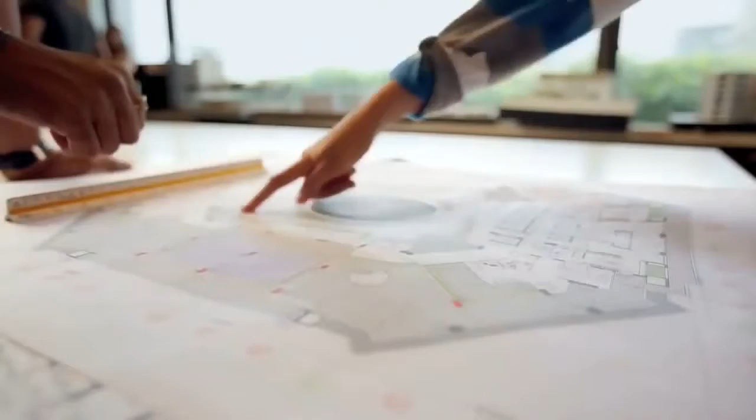It's at the gateway of the new Mumbai, where all the new infrastructural developments and new buildings are coming up. That's the happening location of Mumbai. The architect, Naushad Talati, it was his dream to build a building of such proportion. So he had this brilliant idea of the octagon and angled the views, and I said, wow. So it was like love at first sight.

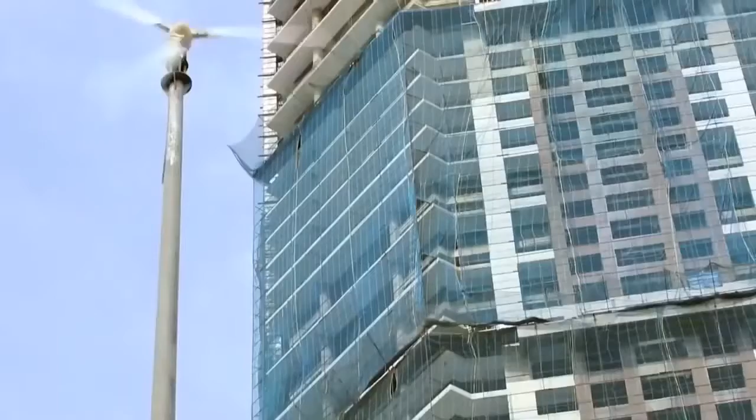The owner in this particular case always kept asking, what is the best that's available anywhere in the world, and said, okay, why can't we adopt it here in India on this particular building? And that led to all these different innovations in design and technology.

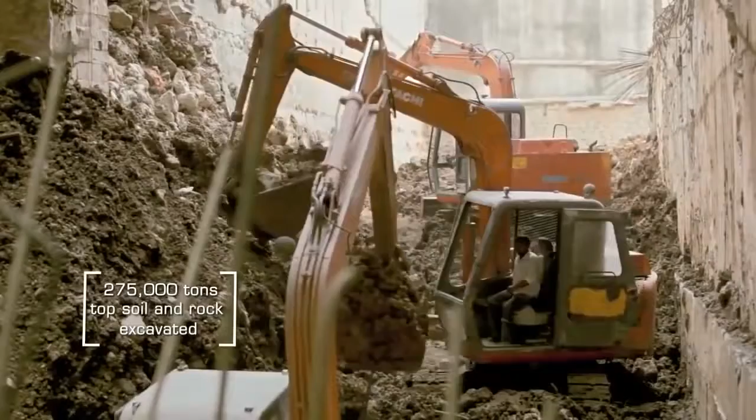Excavation was a huge task. The overall excavation volume in this plot was 150,000 cubic meters, out of which 50% was in the soft soil, filled up soil and marine clay, and remaining was weathered rock.

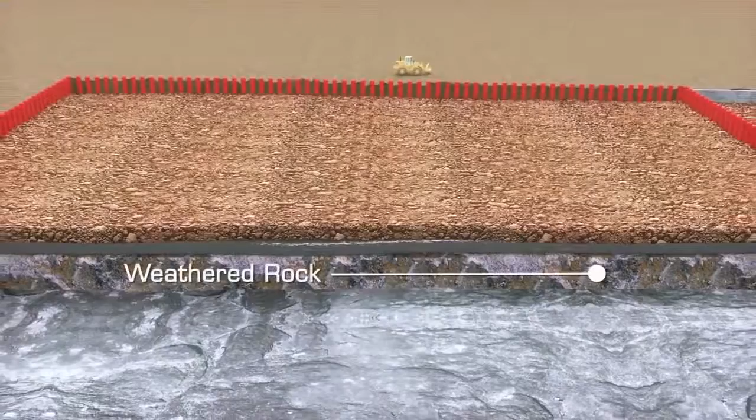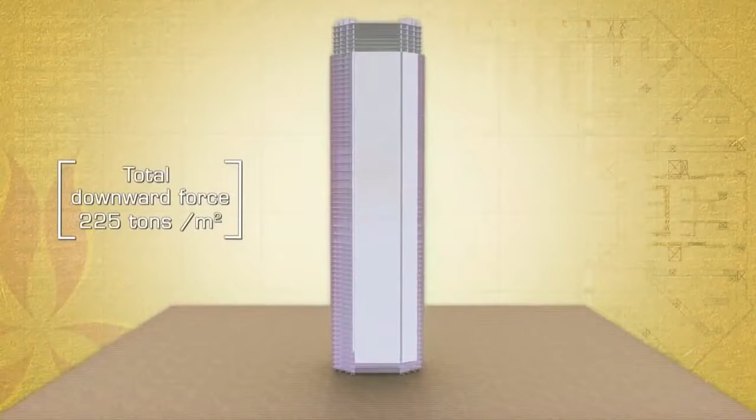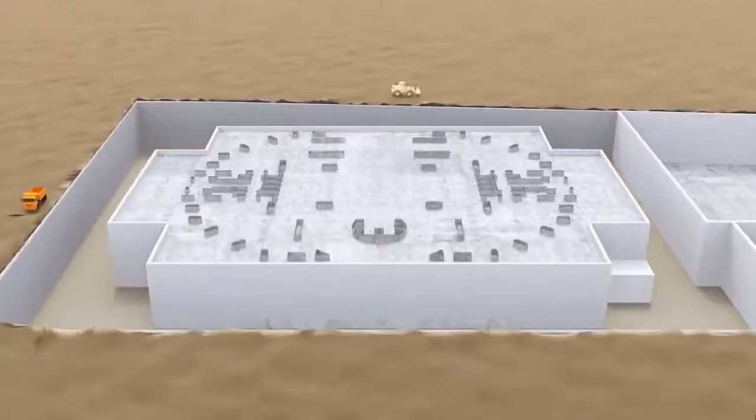We knew it was going to be a challenge designing foundations for this heavier building. So assuming an average pressure of 2 or 2.5 ton per meter square per floor, the pressure that would be exerted by this building on the ground would be on the order of 200 to 250 ton per meter square. This building has a double basement, so we've gone down about 12 meters below the ground, and we've designed the building for full hydrostatic uplift, that is 12 ton per meter square.

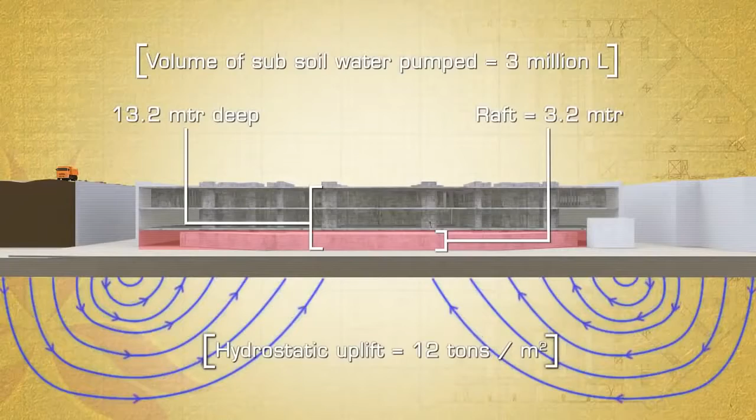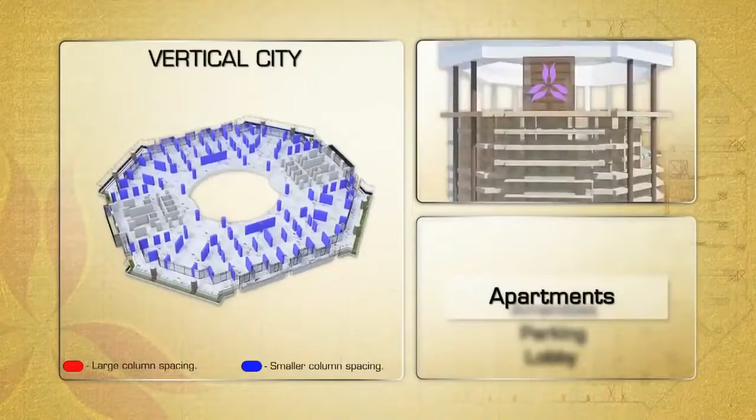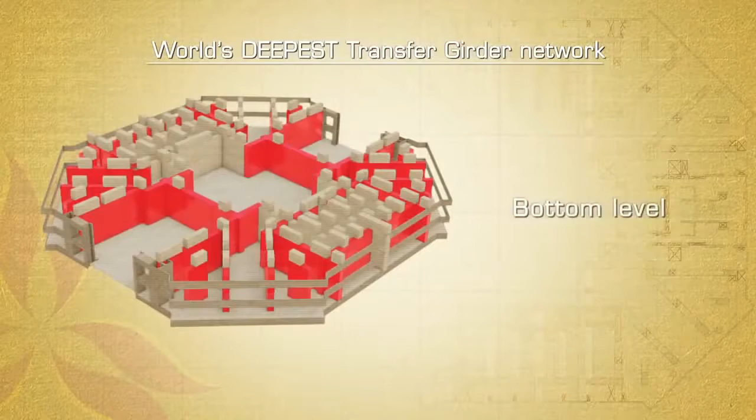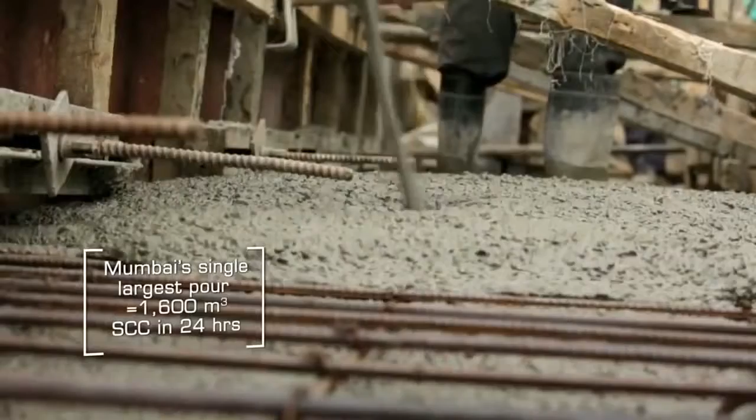The upper part of the building is apartments, then we have the amenity levels, and then below that we have the parking. At the top of the amenity level, we have what we call a transfer girder level. We have a very unique transfer girder system in this building. At 9 meters deep, it's the deepest transfer girder system of any major tall structure anywhere in the world. 12 to 13,000 cubic meters of concrete has gone in this network of transfer girders.

We chose self-compacting concrete because there was going to be a lot of reinforcement in the transfer girders. Coupled with that, post-tension cables, vertical as well as horizontal inside the girders to control deflection and to make the girders act monolithic.

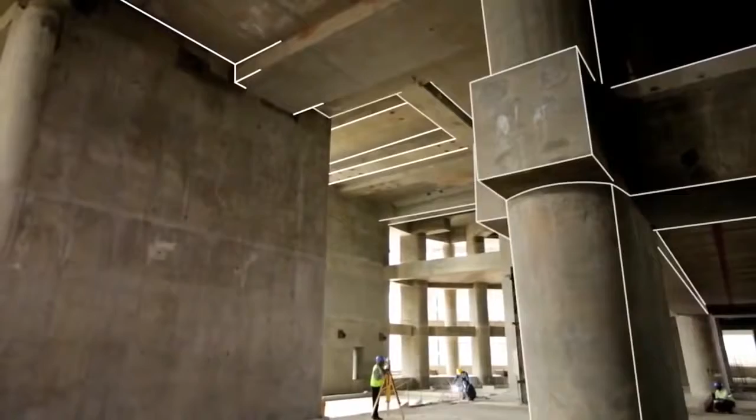When you do a very tall building, if you use those low-strength concretes, the size of the elements become so large that the usefulness of the space diminishes. So you have to develop higher strength concrete. Some of the columns are carrying loads as high as 8,000 tons. There are 2 or 3 types of columns which are carrying loads of 12,000 tons.

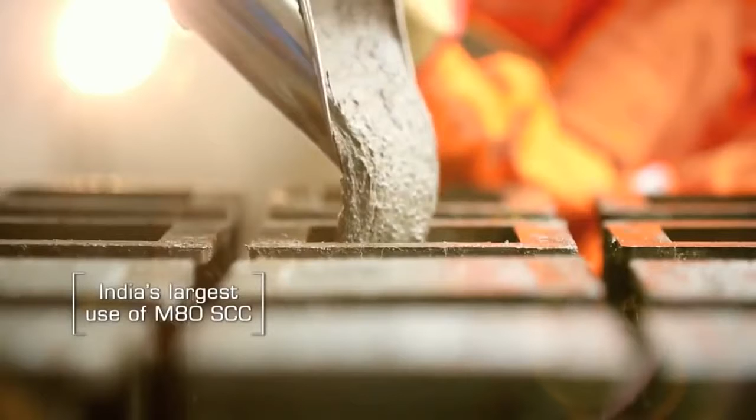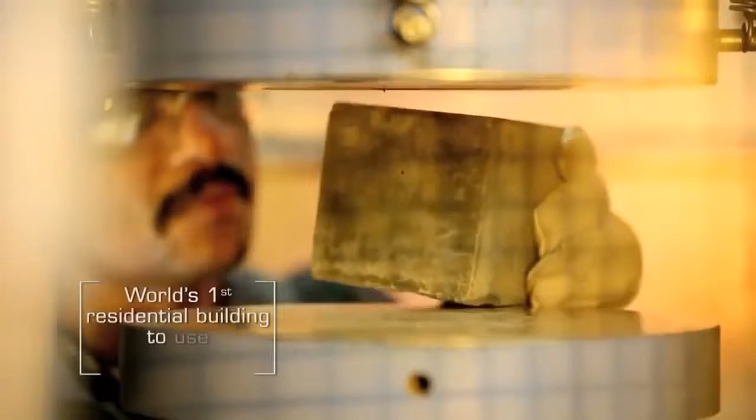If you see, our whole concrete is like a laboratory, a university, where people are studying, and the latest concrete we developed, M80, is amazing. We end up getting concrete which has never been produced before in this country, and indeed in the world. We set up our own concrete institute on site. We also have an electronic batching plant to ensure quality control to the highest standard possible.

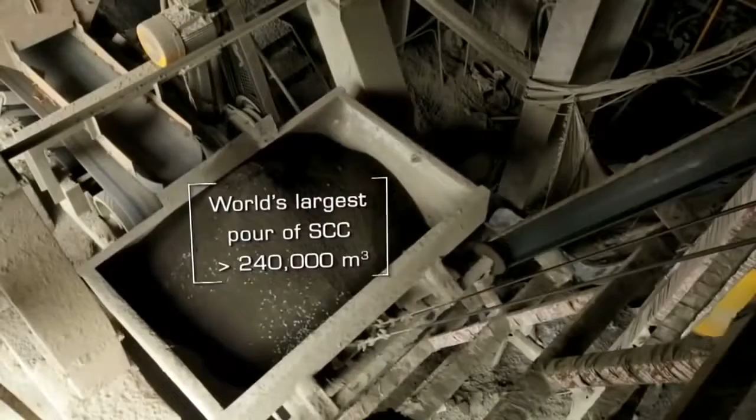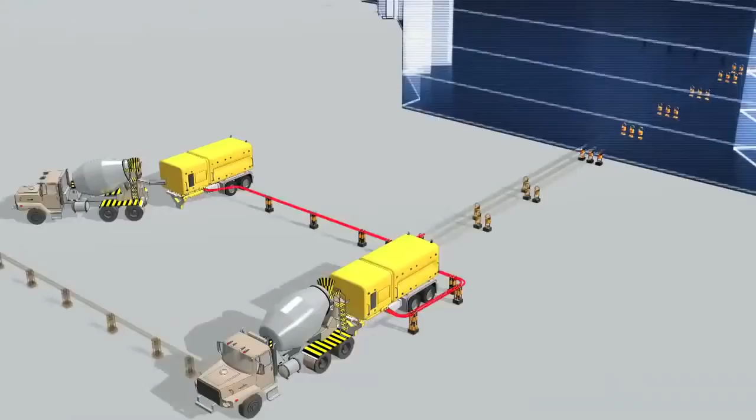Worldwide, if concreting is going to be done above 200 meters, it is considered a big challenge. Every day around 200 to 250 cubic meters of concrete was to be poured. We had to look for high capacity pumps and then a distribution system. So the design of the placing boom was to be such that it distributes concrete up to the extreme end of the building.

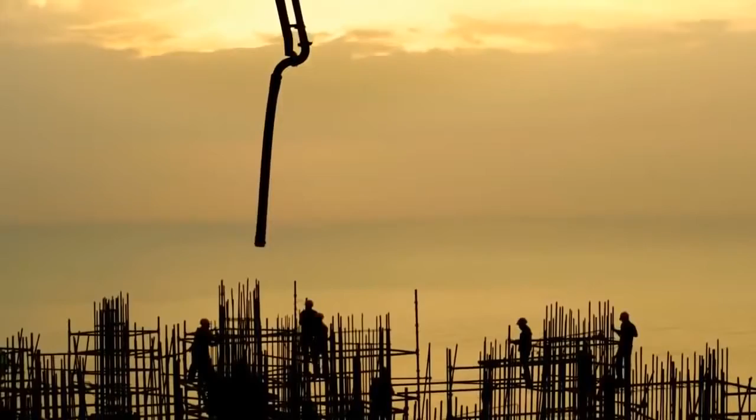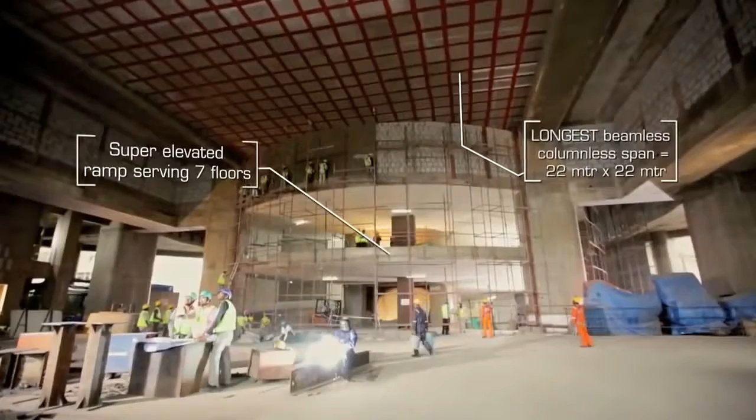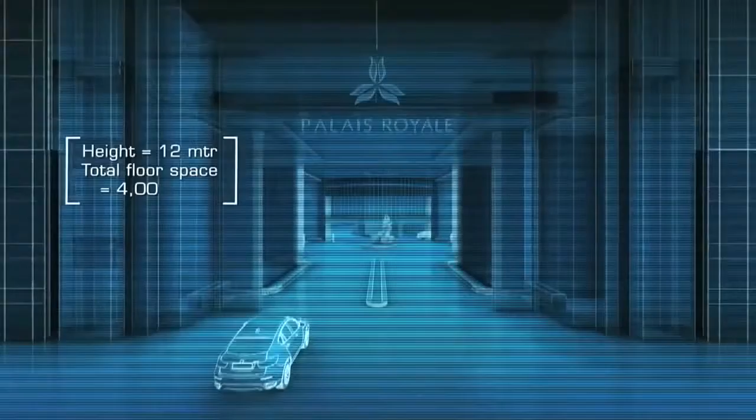I've never seen a lobby of this size in any residential building wherever I've traveled. It's huge, it's awesome. You can come in your own car, get dropped off or drive up the ramp, go to your parking. So that changes the experience of entering into your residence totally. If I am a resident of Palais Royale, if I have to entertain some of the guests, I can receive them in the lobby like a king arriving into his palace.

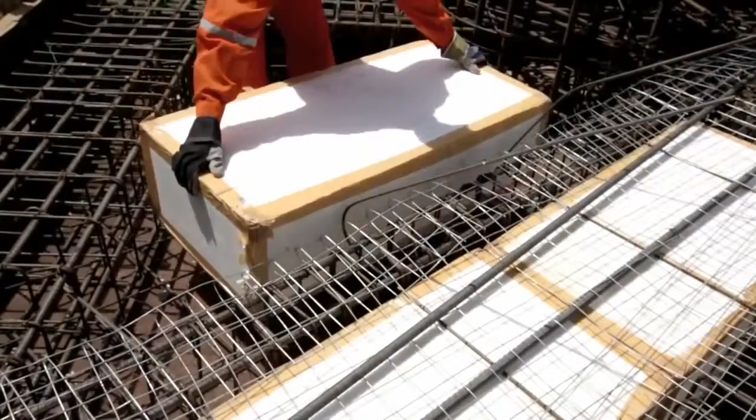We conceived a system of deeper slabs which will give us bigger stiffness to span that large span. We opted for voided slabs which are formed by using very lightweight material such as thermocol blocks.

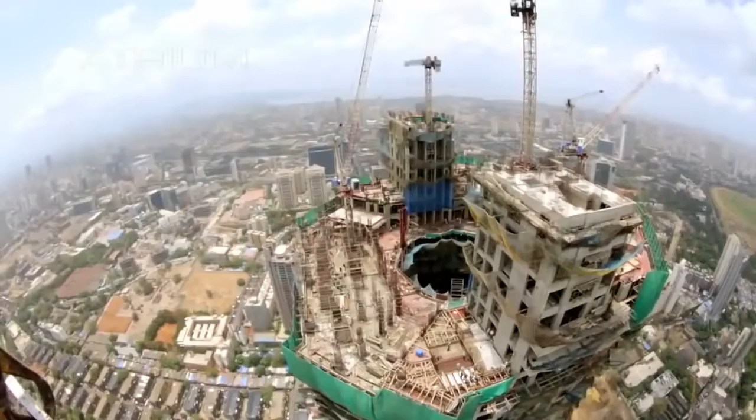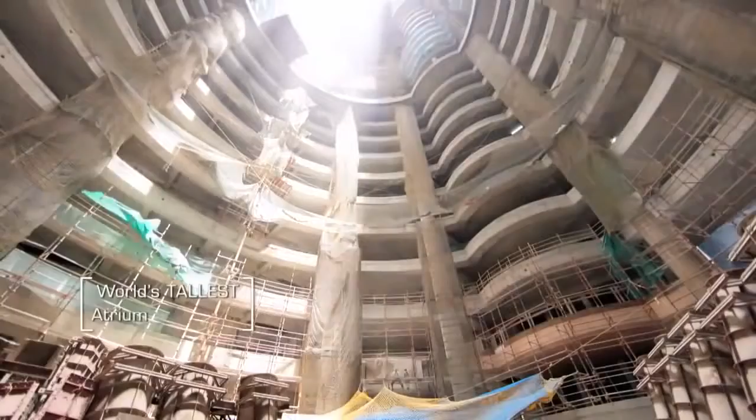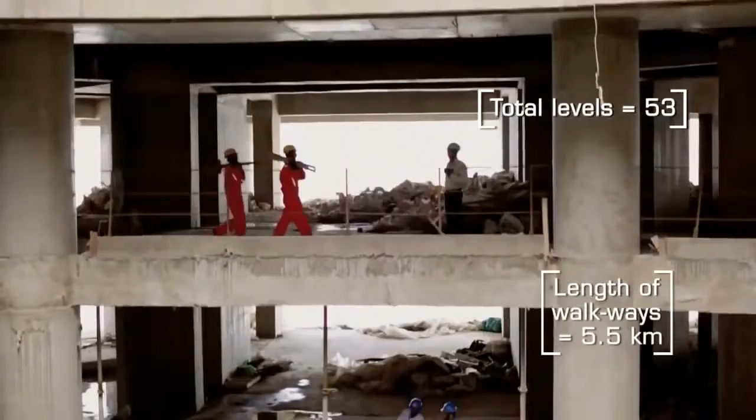We have the world's tallest atrium. We would be 200 meters plus. The atrium came about as a natural feature of the plan, and also the center of the atrium in our Indian context, which we call the Brahmasthan, that means the center of the building. As per the Brahmasthan, as per Vastu, nothing should come up in that center.

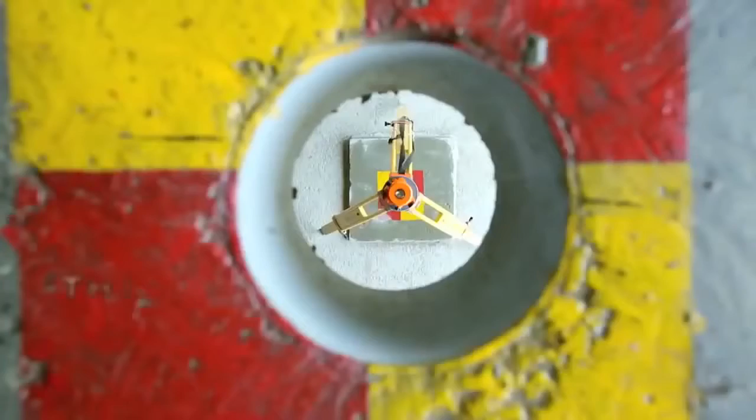The work of art in this building is the design, but the execution is not a work of art. The execution is a science. First and most important quality of a construction is the ability to say that you built the building with the tolerances well within the construction industry standards.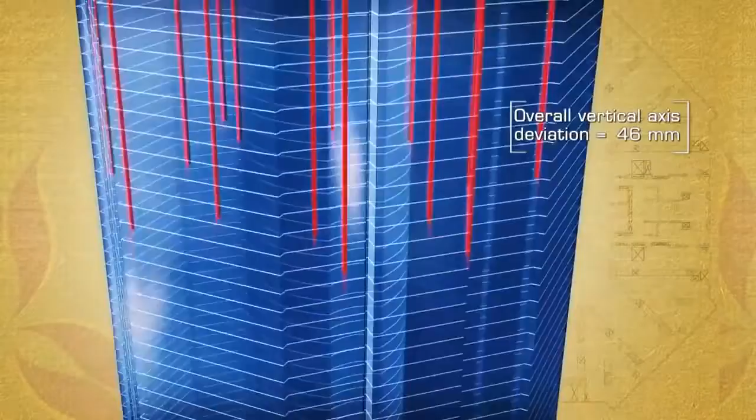Precise setting out and precise construction has been achieved everywhere. The tower itself, we've monitored, we've shown that the top is very vertical above its base. In other words, there's very little lateral displacement of the top from bottom.

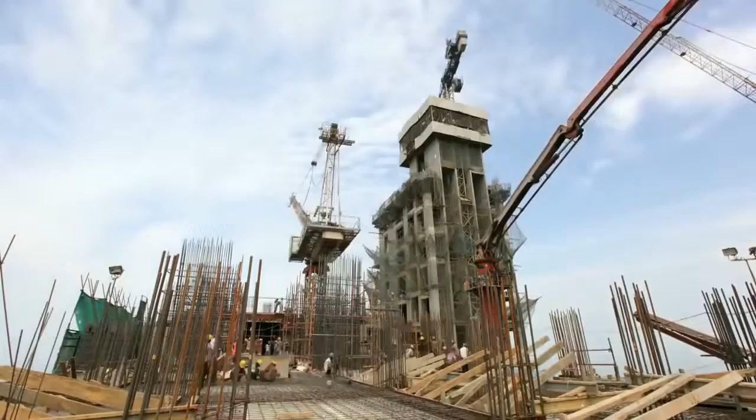The top of towers move laterally. They displace from their plumb as a result of cranes working on top and wind loads. Sun on one side of the building pushes a tower away from it. If you like, the whole thing's moving all the time in every dimension, and it needs to be either compensated for or kept in mind.

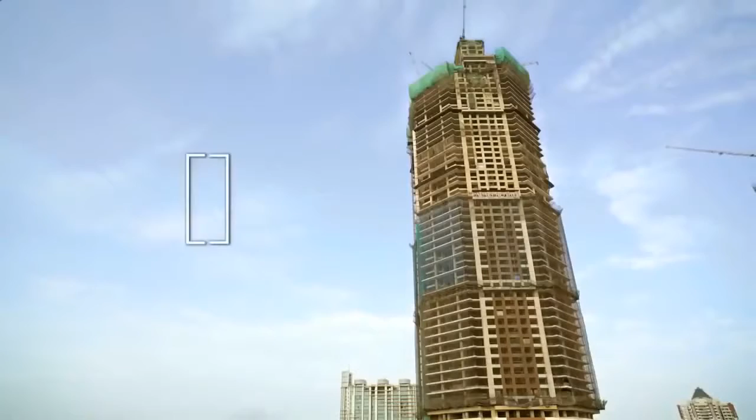We have built in a lot of things by design and in the construction practice, which is highly sustainable. And the decision was made very early on that there would be a system which was self-contained, that water that landed on the side in the form of rain would be collected and harvested and reused.

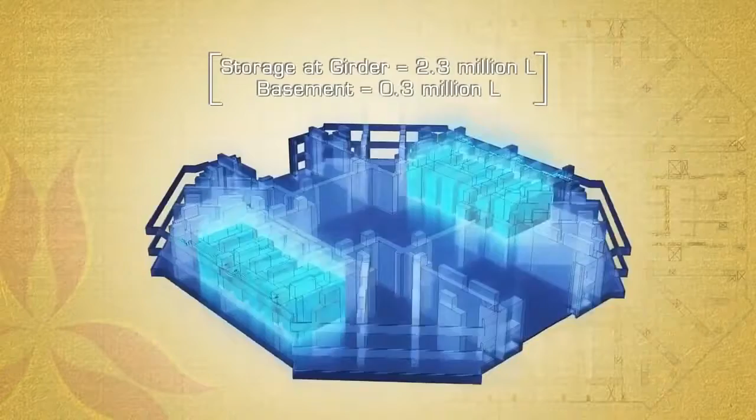We came up with a very innovative idea. Those spaces between the girders, we thought that we can convert them into rainwater storage tanks, and we could create space for more than 2 million liters of water. All this makes the building highly efficient and highly benign from an environmental standpoint.

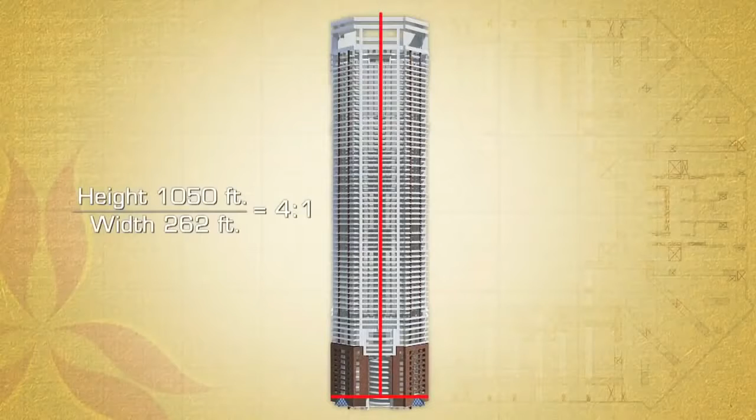An octagonal building is almost like a round shape, and the wind does flow very smoothly past it so that the impact on the building is very low. This building has got an aspect ratio, which is the height to the least width, of 4. What that means is that we have a very stable building.

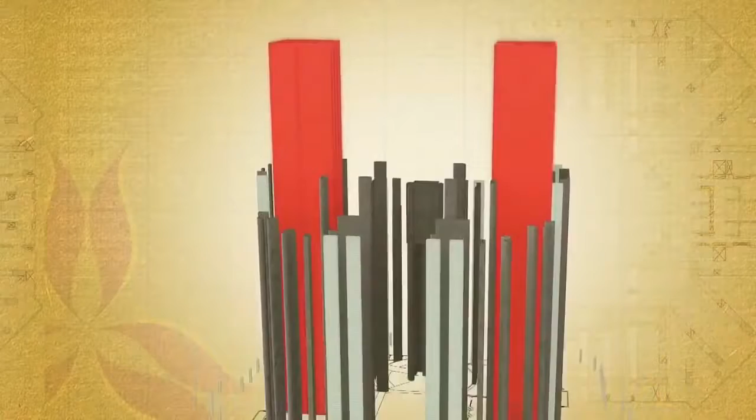This is the first time in India a grade 2 immediate occupancy building has been made. Probably the first time a residential building in the world is a grade 2 building. The building has 2 lift cores which we have converted into a spine-like structure, and in addition the framework provided by the columns and beams helps resist the forces of the earthquake.

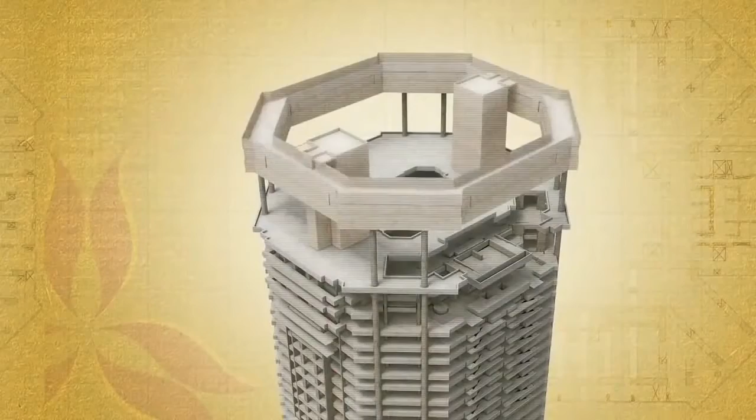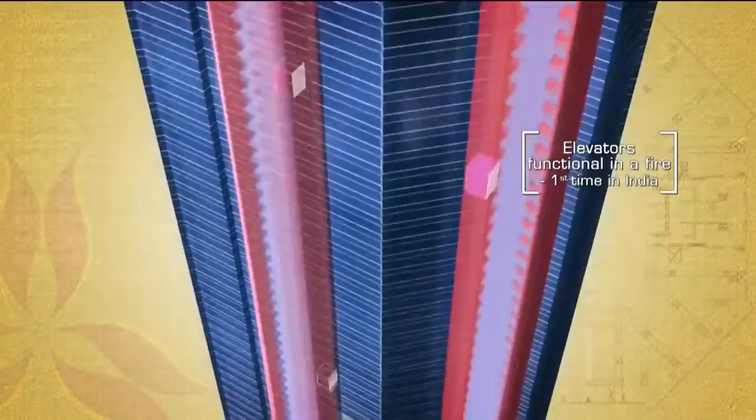The architectural design of this building gives us tremendous advantage in terms of fire and life safety. Everything is duplicated, meaning we have a set of elevators, we have a set of staircases, we have protected lobbies. They become kind of a fire tower.

Palais Royale will be the safest building in Mumbai. Anybody who's going to occupy this can have a very comfortable sleep. It's going to be the last one standing, so that's for sure.

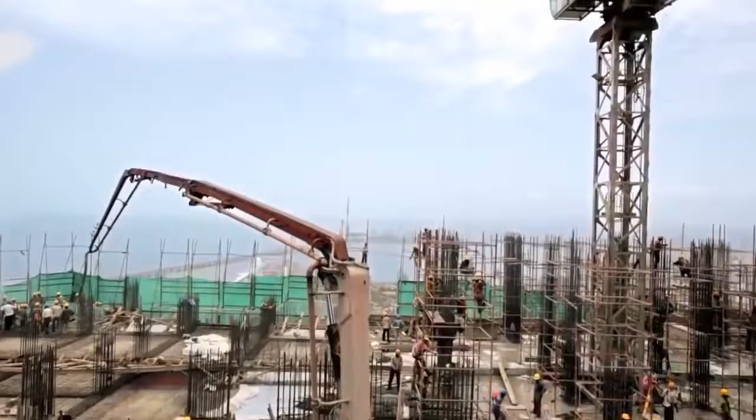In the history of construction in Mumbai, none of the construction sites has ever had this kind of labor force. The safety standards and housekeeping standards we have been able to maintain here can be compared with international standards. It started first with the owners and the top management being very, very fussy about safety.

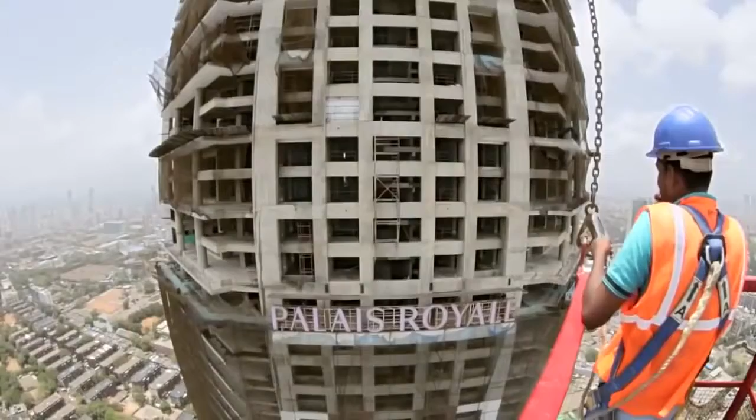People would say, you're going to spend so much money every month on shoes and helmets. Okay, we will live with the reduced productivity, but we were not willing to compromise on safety. There's decent and hygienic labour quarters on site in the lower levels of the tower. When people are looked after, in return they give something back, and I think it's a very decent workplace.

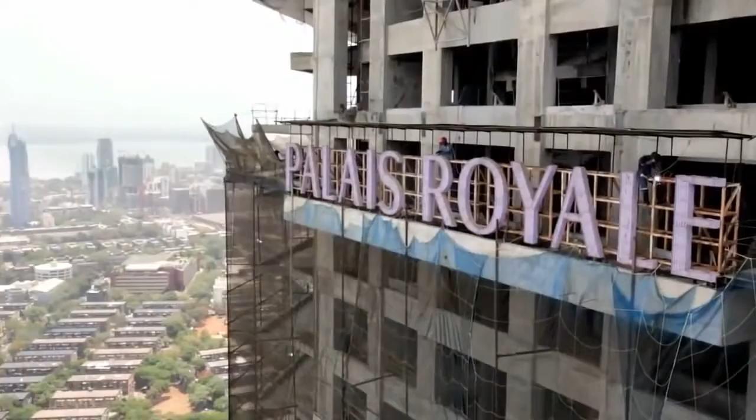The development of technologies is going to set a standard, I believe, for future construction, and that's one of the things that Raghuveer did very well on this project. We thought of doing it and we did it, and in that process we gained all the specialization and skill. We had to look for the cranes which were able to work at 300 meters high. Wherever we felt that this machine will be suitable for our building, those were brought to the site.

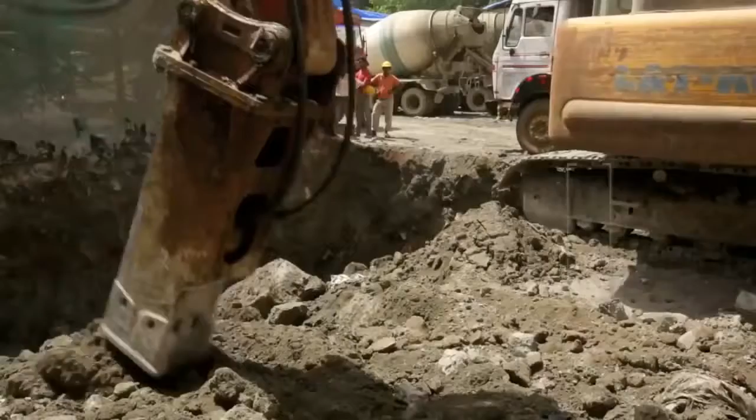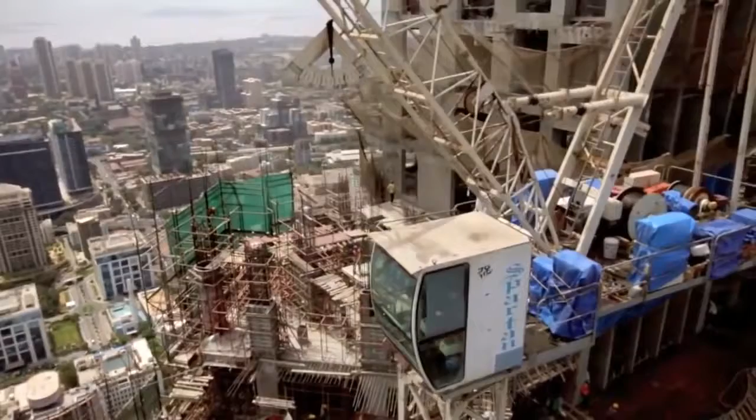So today, if there is a talk of constructing high-rise buildings, Raghuveer is very confident. I think teamwork is the key to success. My role as the facilitator has been more in terms of encouraging each of my team members to dream the impossible dream. About 30 people sit in the meeting.

Everybody concerned. Water supply, electricity, air conditioning, concreting, structural engineering, architects. The whole lot of them are there, and there is a freewheeling discussion. You are given complete freedom to propose anything and to design anything which suits the best for a building. Apart from using my knowledge, there was a lot of learning also. And this has certainly left me richer.

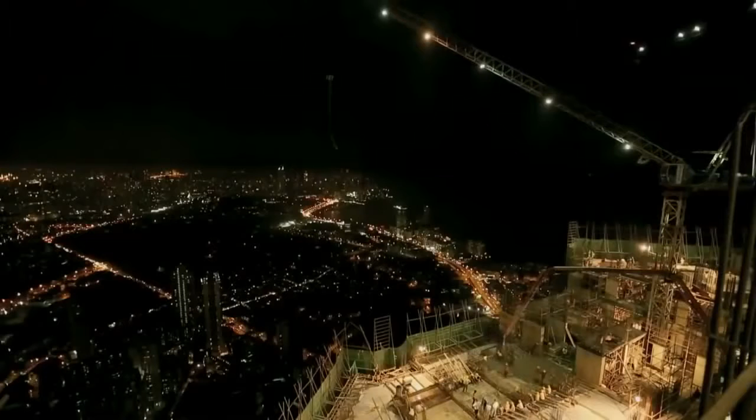We are part of this team which is putting up a first of its kind project in Mumbai and India. It's a matter of immense pride for all of us. I think it's placing them right up there in the Indian construction industry. They're making big and positive steps forward. To see that what you've imagined has actually physically come up, it's just an unimaginable feeling.

It will be looked upon as the way to do good quality buildings. I think it is going to be a standard bearer for construction in India for a very, very long time. There are a lot of modern construction companies in India, but we have introduced the concept of doing an engineered building in this sector of residential buildings. So we've taken it to a different level.